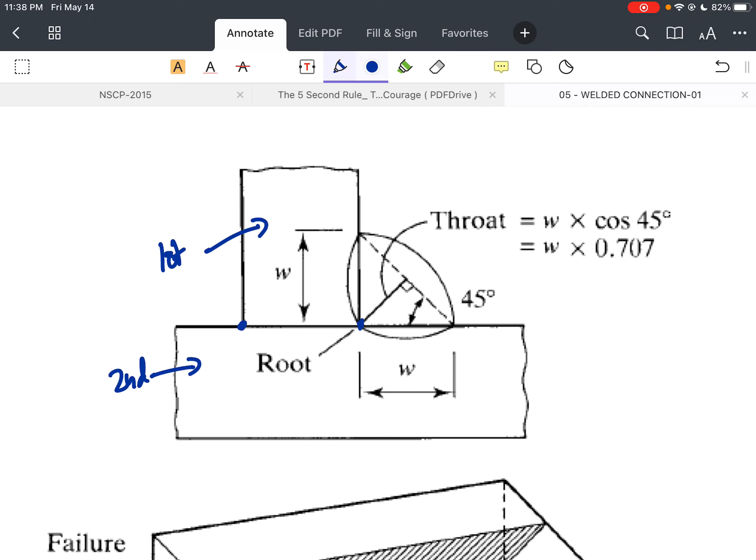So dito sa side na to, kung dito tayo maglalagay ng weld sa right side, ito yung magiging root niya. Ano naman yung tinatawag na throat? Yung throat o your theoretical throat is the shortest distance from the root up to the hypotenuse of the triangle. Ito yung hypotenuse na sinasabi natin. So yung root hanggang dun sa hypotenuse is your throat or your theoretical throat.

The throat area equals the theoretical throat distance times the length of the weld. Now, the effective throat distance is taken as the leg size, times sine 45 or cosine 45, whichever it is, kasi parehas lang naman yung value niya, or 0.7071. So yun yung magiging effective throat distance natin.

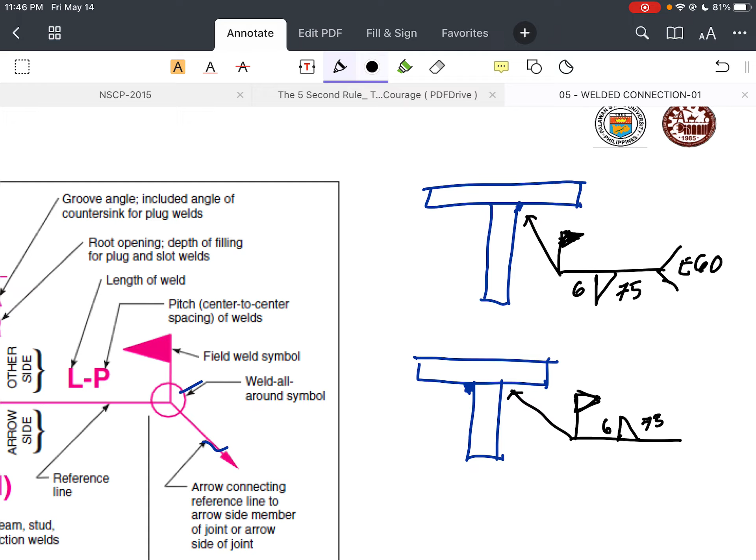Tapos, i-specify natin yung strength niya, which is E60. Parang ganun lang. So hindi naman, depende rin, sabi ko nga, depende rin naman sa i-specify kung anong ilalagay mo. Hindi lahat yan ilalagay mo dyan. Kasi iba-iba rin magiging, ano mo sa types pa lang, iba-iba ng kaagad, di ba?

Okay, so let's go to the matching weld filler metal. The principle sa pag-design ng connection is that the connecting material is always stronger than the base materials. Kung wood man yan or concrete or steel, dapat mas malakas yung connecting material mo. Ibig sabihin, yung matching weld metals natin have to be stronger or mas malakas doon sa magiging base metals natin na pagdudugtong natin.

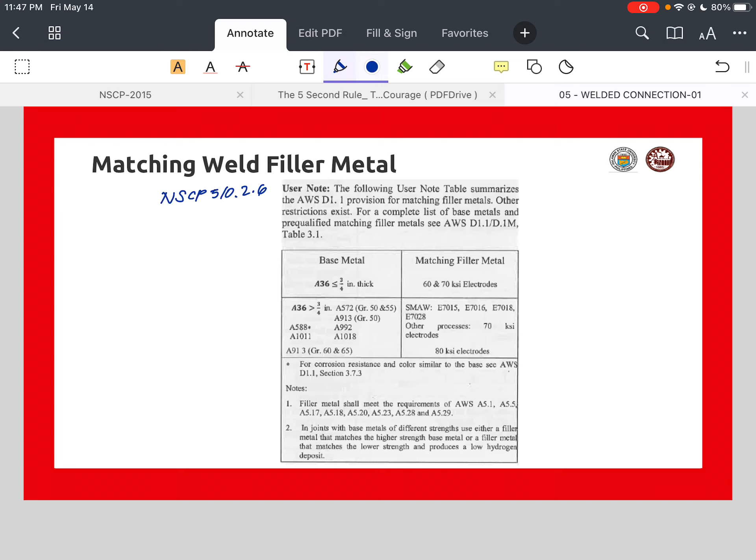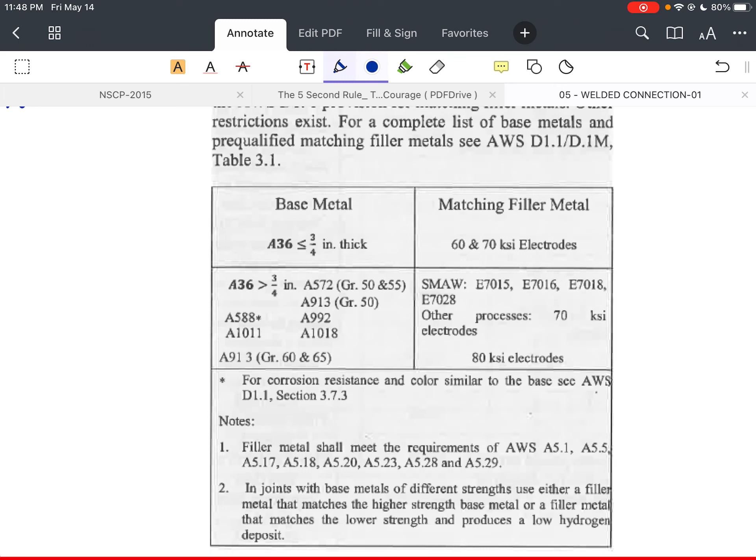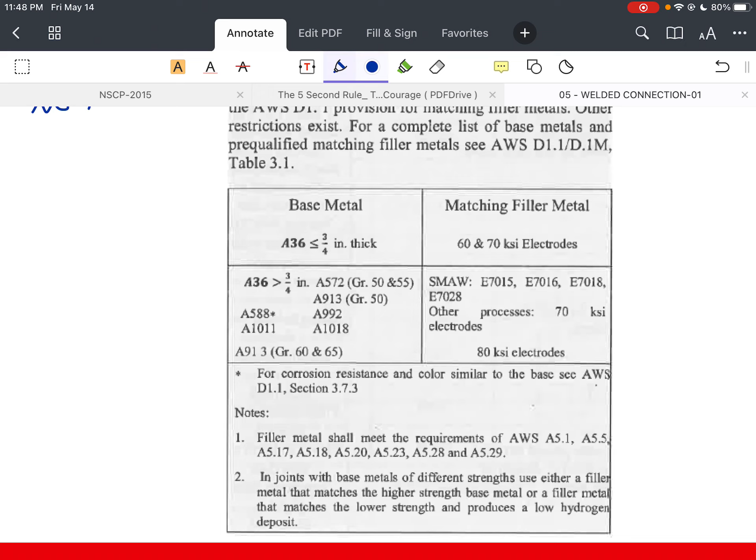Okay, sa NSCP 510.2.6, meron ditong table. For the pre-qualified matching material, and also another table for the CJP groove, this is reproduced here. Okay, so kung A36 na less than 3/4 inch thick or 19mm, ang gagamitin mo dyan is 60 or 70 KSI electrodes. Pag more than A36 na more than 19mm, ito naman ang gagamitin, and so on and so forth.

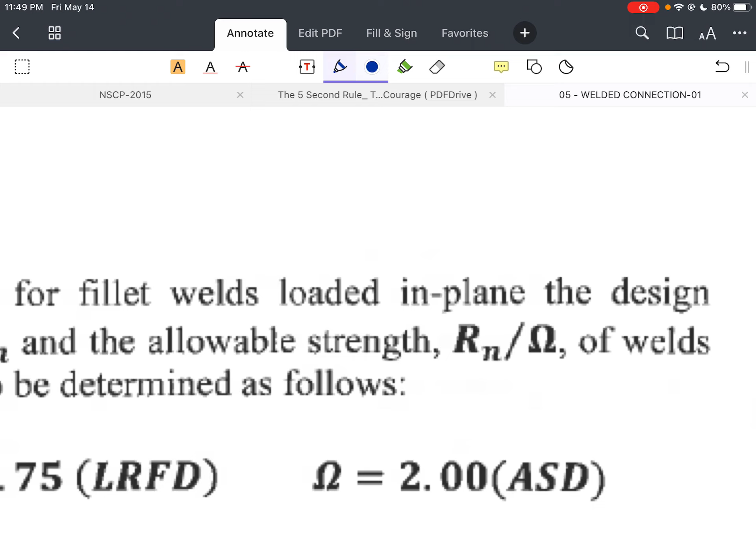Okay, now let's go to the weld strength naman. Sa NSCP 510.2.4, the design strength, which is your phi Rn, and the allowable Rn over omega of the weld, shall be the lower value of the base material and the weld metal strength determined according to the limit states of tensile rupture, shear rupture, or yielding.

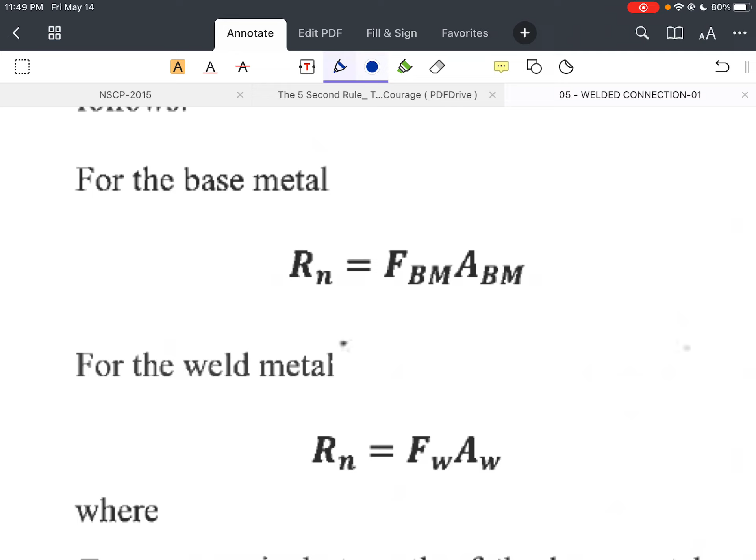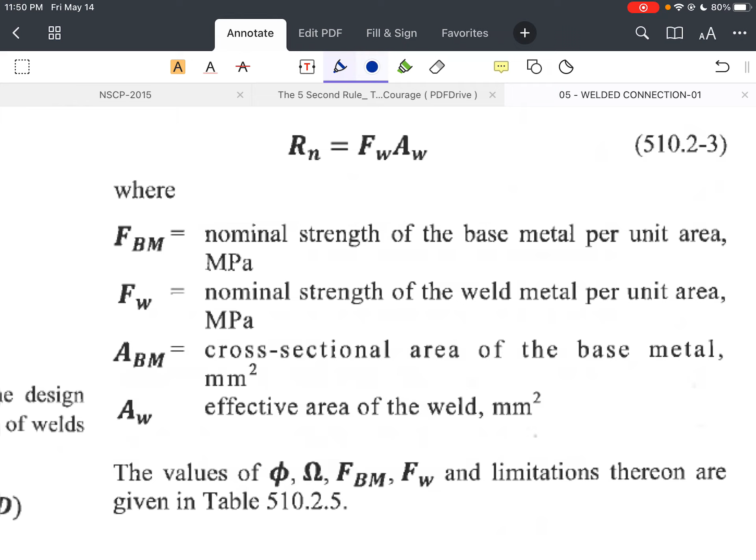For the weld material, or for the weld metal, the formula will be Rn equal to Fw times Aw. Pagdating naman sa base metal mo, ang formula natin is Rn equal Fbm times Abm. Ano ba yung mga variables natin? Yung Fw is the nominal strength of the weld material per unit area. Your Aw is the effective area of the weld. Yung dalawang yun ay para sa weld, and yung remaining two, the Fbm is the nominal strength of the base metal per unit area, and the Abm is the cross-sectional area of the base metal, of course in square millimeter.

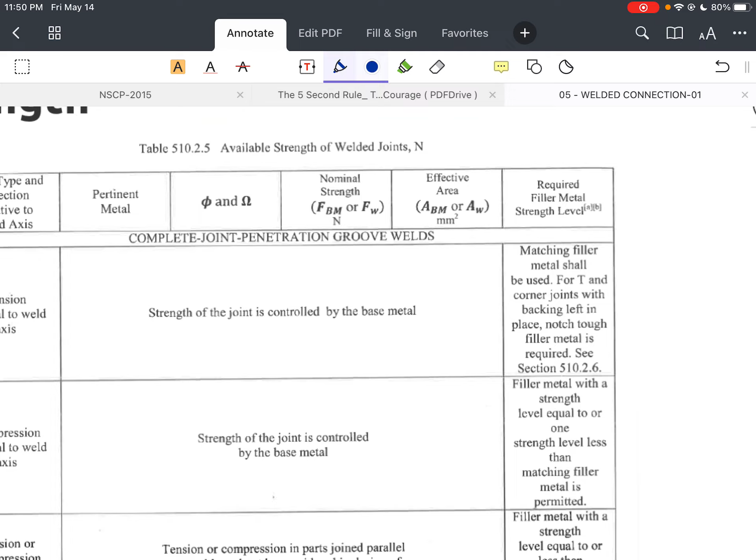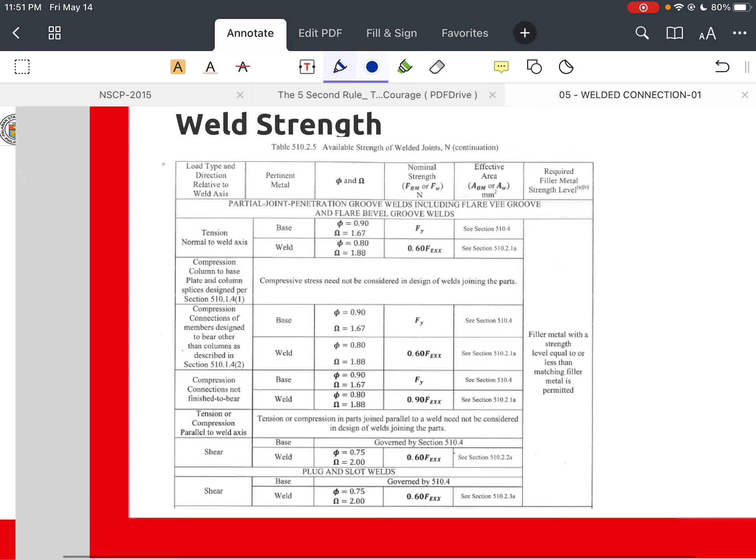Now, the available strengths of welded joints are listed here at the table, 510.2.5 for CJP, and sa next page is yung para sa PJP. Meron din dito, given na rin yung para sa slot and plug welds, and of course the fillet welds.

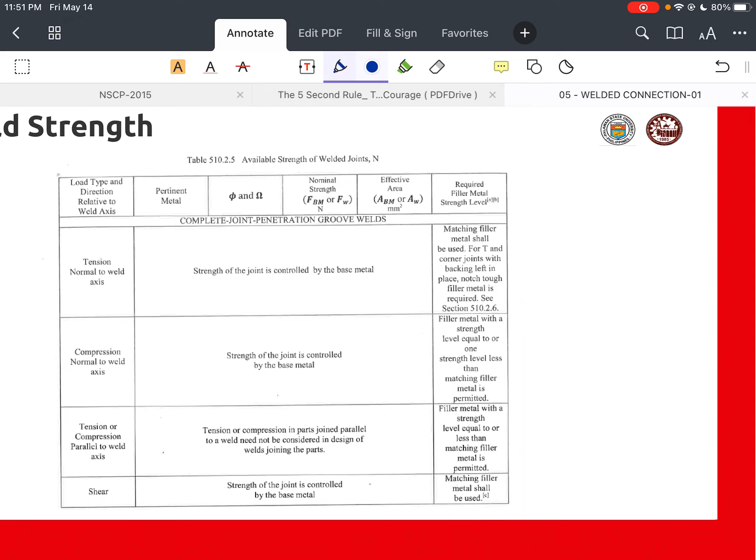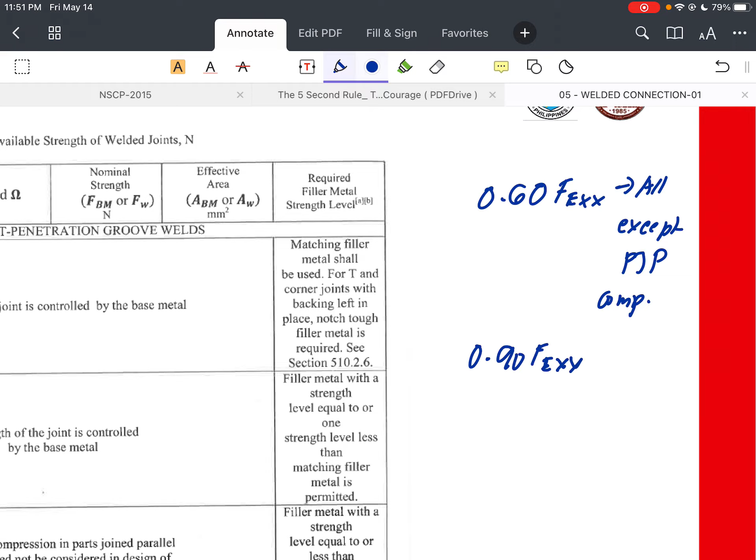So in general, the nominal strength is 0.60 FEXX, except for PJP compression connections not finished to bear, where the nominal strength is 0.90 FEXX. Okay, so tatandaan nyo lang lagi, 0.60 FEXX para sa lahat except PJP compression connection, which is yung 0.90 FEXX. Okay, pagdating sa CJP penetration.

CJP or complete joint penetration welds, the weld should have at least the same strength as the pieces joined, since groove welds are intended to transmit yung buong load dun sa member na pinag-join natin. Para dun sa full penetration groove welds, the area of the weld is at least equal dun sa area ng base metal natin. Now, since the weld material is stronger, the capacity of connection is generally the strength of the base metal.

Okay, now pagdating naman sa PJP, or partial joint penetration welds, kailangan siyang i-check din whether yung weld or yung base material is critical, kasi yung effective area ng weld is mas mababa dun sa area ng base metal natin. Okay, now according to the table, pwede natin i-summarize yung mga nakasulat dito.

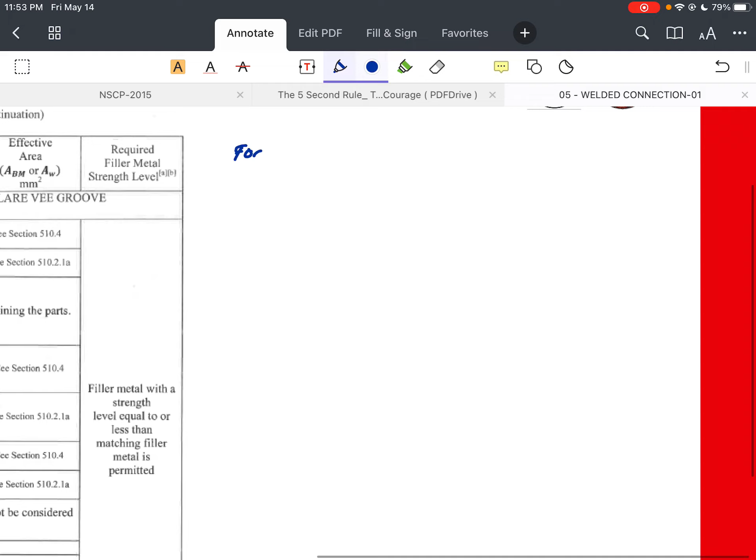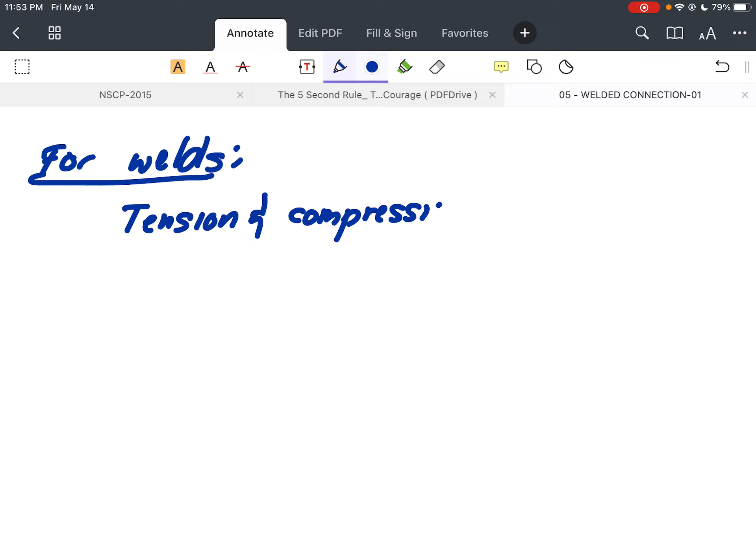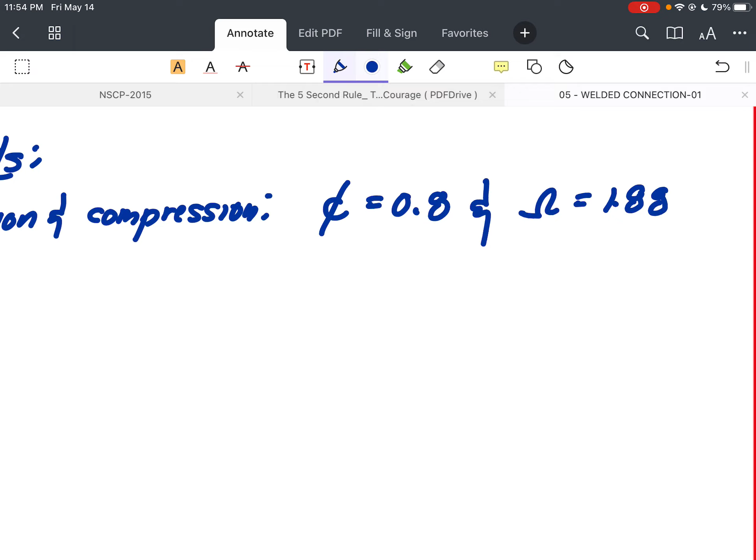For welds, your tension, yung phi natin for LRFD is 0.80 and the omega for ASD is 1.88. Pagdating naman sa shear ng weld, your phi is 0.75 and your omega is 2.00.

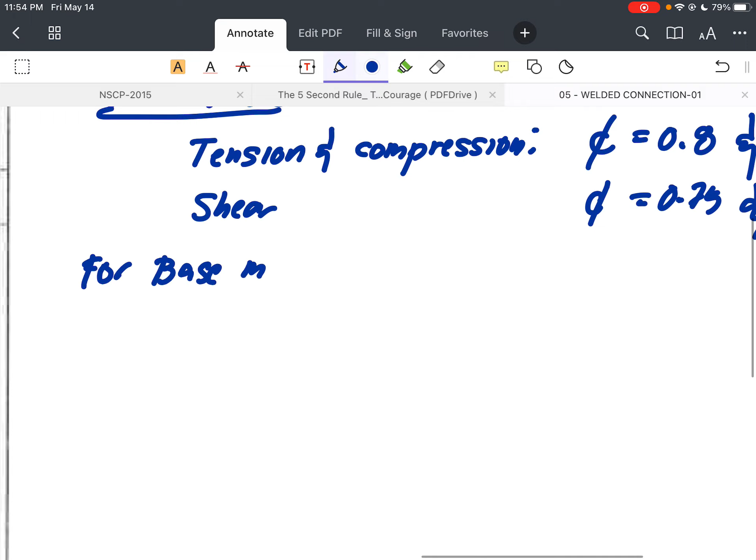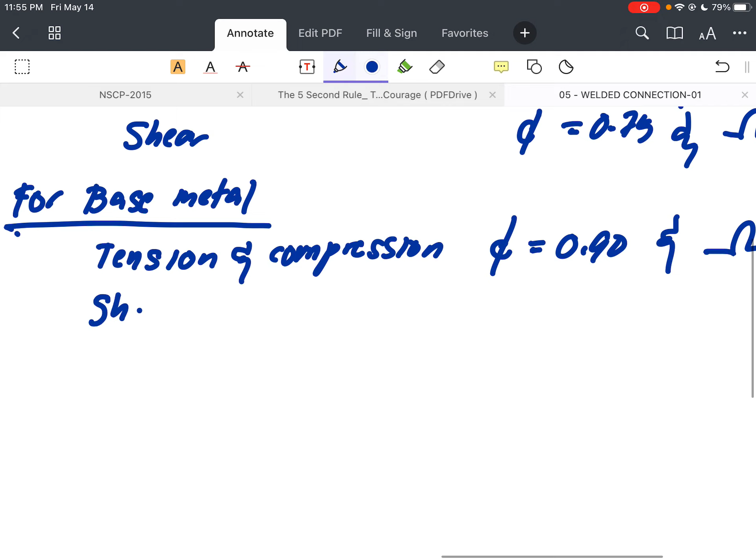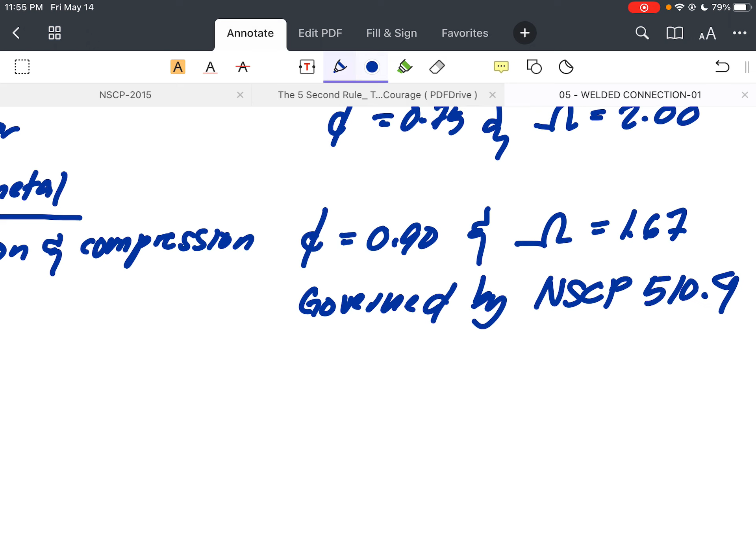So yung base metal naman natin, o yung steel na kinoconnect natin, una doon sa tension and compression or the axial, your phi for LRFD is 0.90 and omega is 1.67. Pagdating naman sa shear, mag-govern siya, or it is governed by NSCP 510.4.

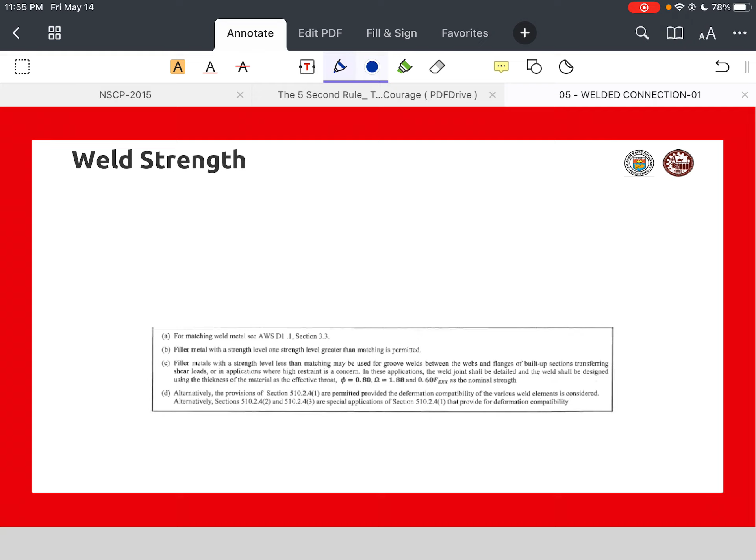Okay, so yun yung summary, or basically ito yung values na gagamitin natin. Ito ay karugtong lang ng table. Kasi mas pag pinilit ko siya dito sa page na to, hindi na masyado makikita yung text, so I transfer the last part sa next page. Okay, so let's go to the plug and slot welds.

So as can be deduced dito sa figure natin, the action of plug or slot welds is shear. Shear yung force na mag-act upon this kind of connection, shear yung mag-act sa contact area, which is defined by the nominal area of the hole or slot in the plane of the faying surface.

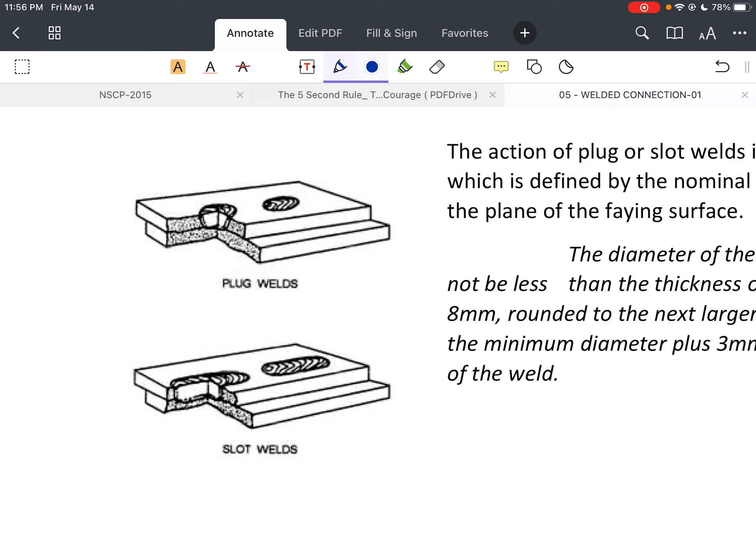Okay, so sabi sa NSCP, the diameter of the holes for a plug weld shall not be less than the thickness of the part containing it plus 8mm. Ibig sabihin, your D should be greater than or equal to T, yung thickness ng part, plus 8mm, rounded to the next larger even mm. So dadagdagan mo siya ng 2 kapag even to, dadagdagan mo to ng plus 2, pag odd, plus 1.

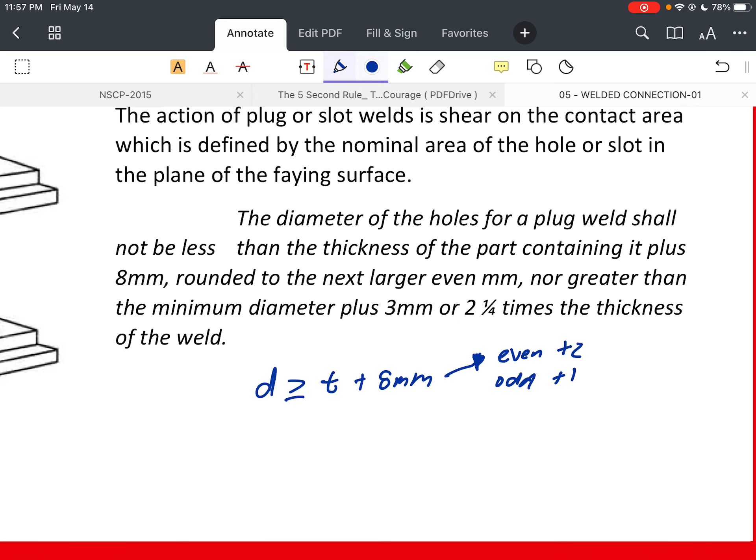D shall not be greater than the minimum diameter plus 3 mm, or 2 1/4 times the thickness of the weld. Again, D shall not be greater than that. It should be less than the minimum D. So it's the minimum D plus 3 mm, or minimum D times 2 1/4.

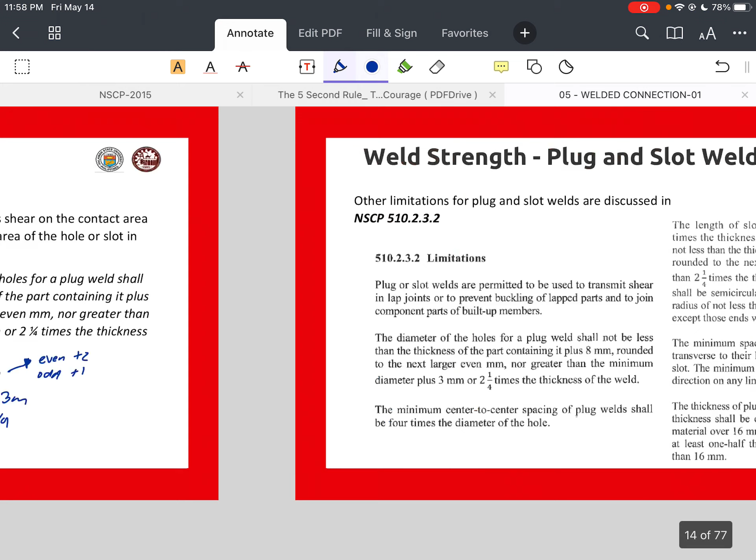So let's have, other than that limitation, there are other limitations for the plug and slot welds in this section in NSCP 510.2.3.2. So just read it, I won't explain the other limitations for you.

So let's have now the example. For example number 1, design the lap splice to develop the full strength of the connection shown. Use A36 steel and ASD. There's no drawing given, so let's draw it ourselves.

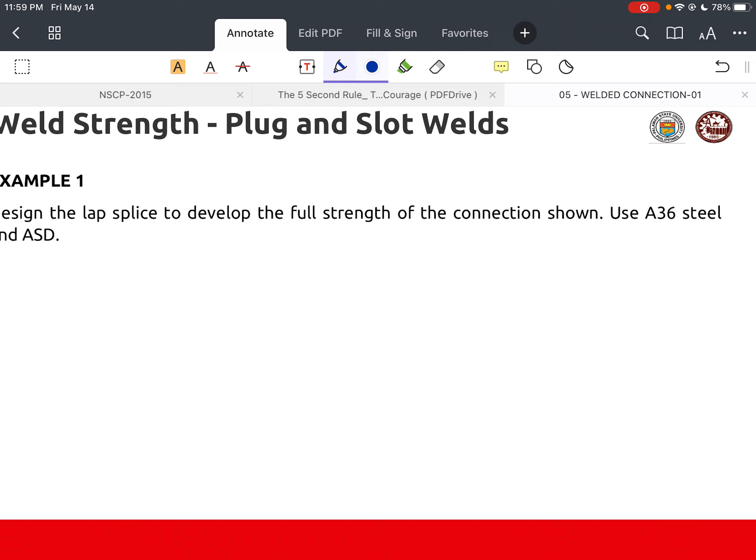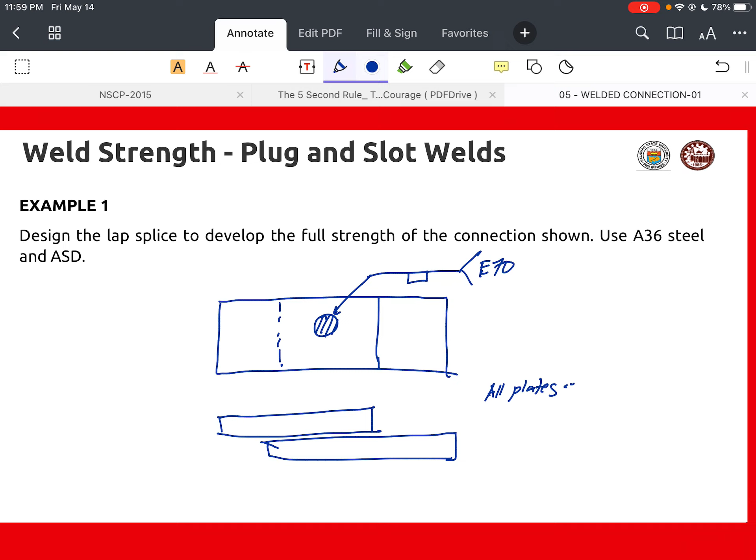So I have here, let's use plug or slot weld sign, E70. So let's draw the elevation. So all this plate, all plates is PL12, or plates with thickness of 12 mm. So you have T and T. What else? Width, which is 250.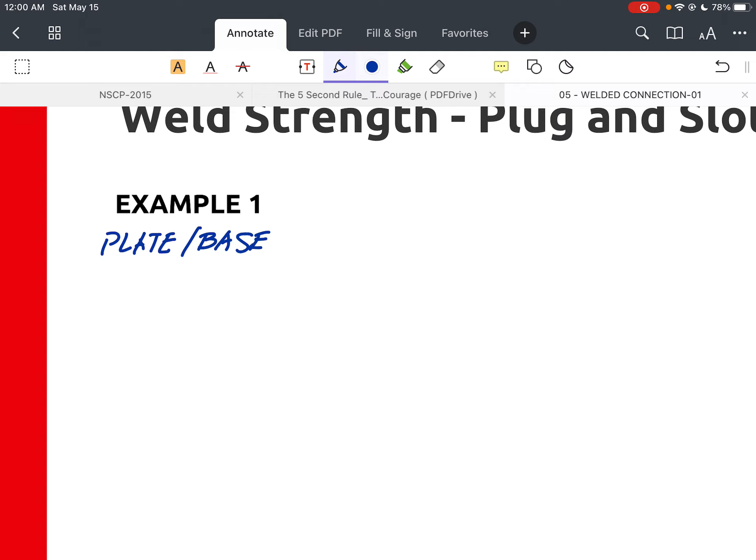Now, the full strength of the plate in tension is its yield capacity. Let's go to the plate, or base metal. So again, the full strength of the plate in tension is its yield capacity. So you have T equal to AG Fy.

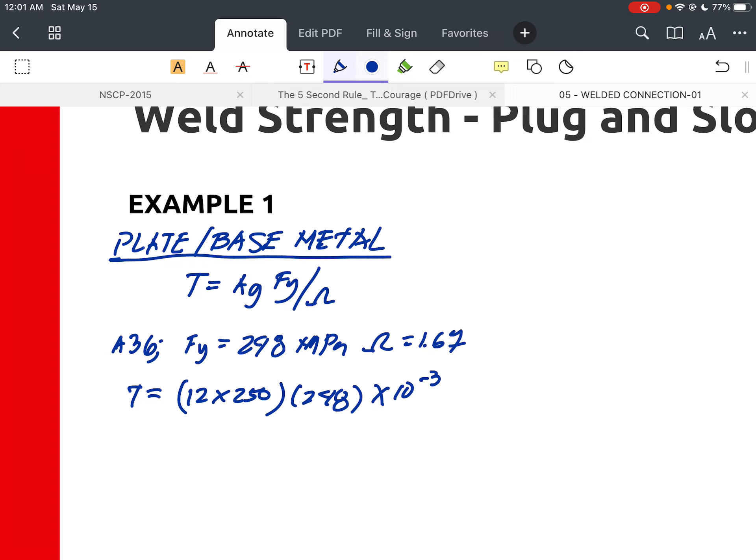We said earlier we'll use ASD too, so over omega. Now, for A36, your Fy is 248 MPa and omega is equal to 1.67. So therefore, the tension capacity of the plate is 12 times 250 times 248 times 10 negative 3 for conversion, over 1.67. This will be equal to 445.51 kilonewton.

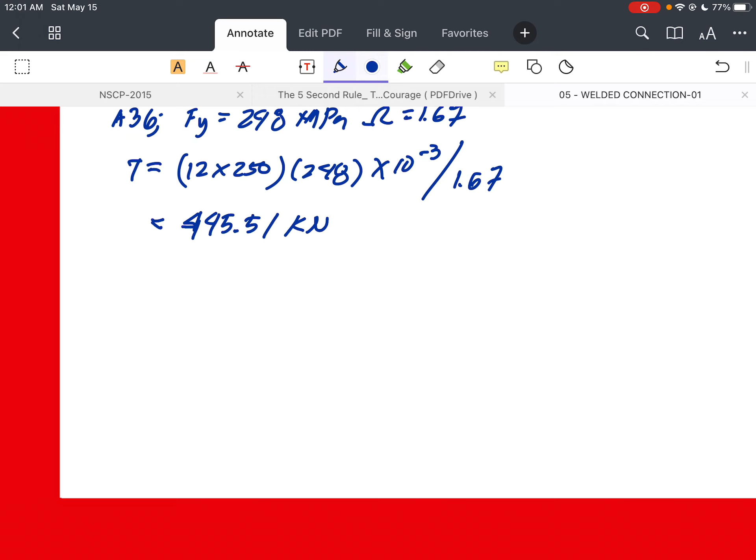Now, coming to our weld, the weld usable capacity based on its shear strength is T is equal to 0.6 FEXX times AW over omega. Now, the required area, or required AW, is equal to omega times T over 0.6 FEXX.

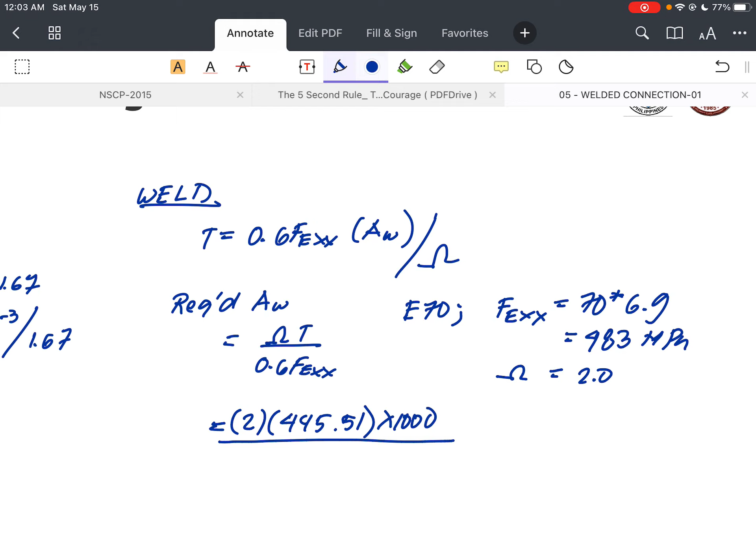The weld metal tensile strength for E70 is, for E70, your FEXX is 70 times 6.9 for the conversion, to become MPa, is 483 MPa. And of course, your omega is 2.0. So your required area will be 2 times 445.51 times 1000 for conversion, over 0.6 times 483, which is equal to 3074.6 square millimeter. Now, therefore, we have AW.

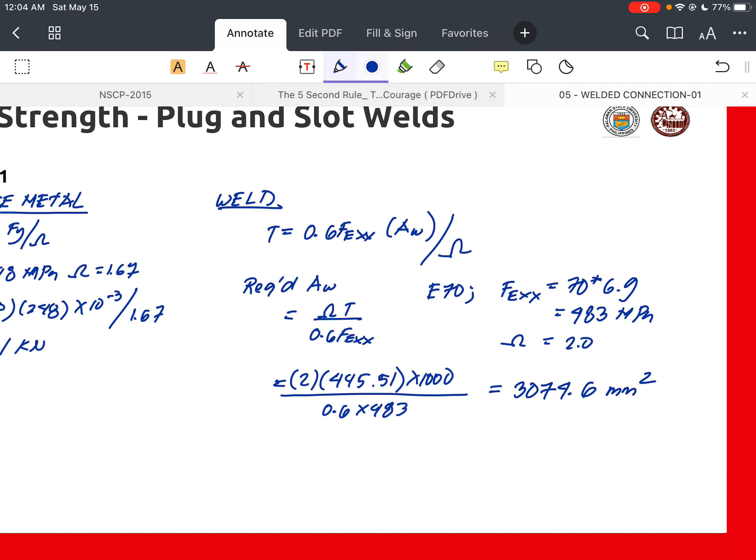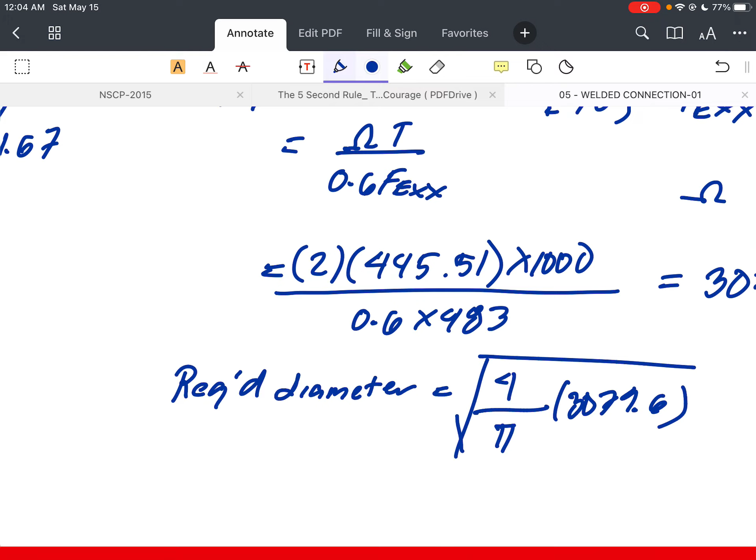So to get our diameter, your required diameter is equal to square root of 4 over pi times 3074.6. So this is 62.6 mm. So let's say, let's say 75, to simplify, let's round up. So 75 mm diameter. Okay, so that's for our first example, our example for plug and slot welds.

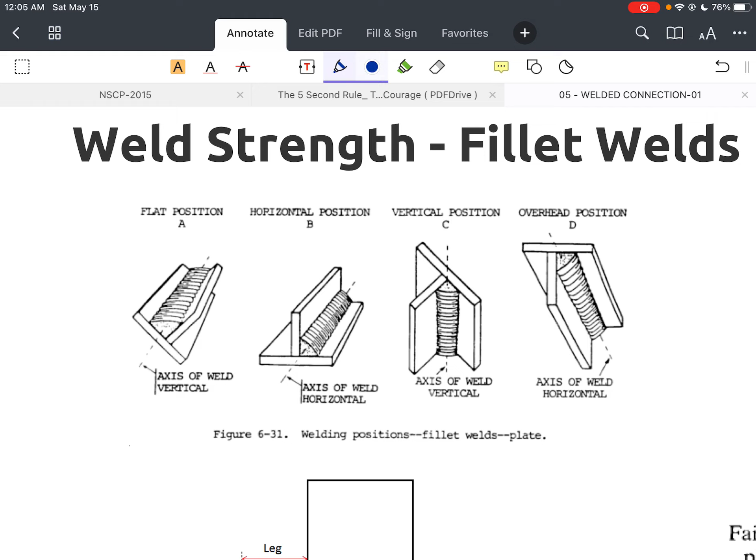Okay, so let's go to fillet welds now. The fillet welds that resist tensile force not parallel to the weld axis, or proportioned to withstand repeated stress, shall not terminate at corners of parts or members. So the typical fillet we have is this. So you have base metals which are not parallel, or not in the same plane. So in this case it's perpendicular. So it's connected with fillet welds. You have the root, and of course you have the leg and your throat.

So just like in plug and slot welds, the stress of the fillet weld will always be shear, regardless of the direction of the force on our base metal.

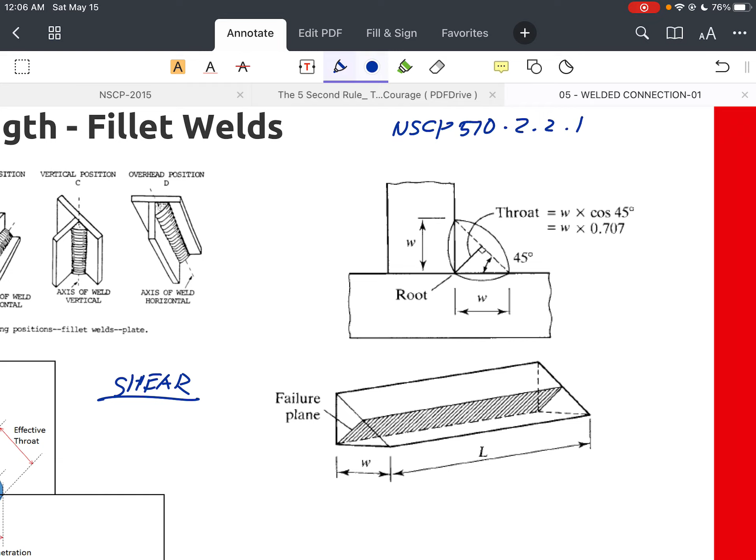Now, coming to effective area, according to NSCP 510.2.2.1, the effective throat of a fillet weld shall be the shortest distance from the root to the face of the diagrammatic weld. So that means the effective throat is given by the expression 0.7071 times W. Or in this case, usually in other books, the leg is written as W or A. So you'll notice, basically the 0.7071 is multiplied to the leg size.

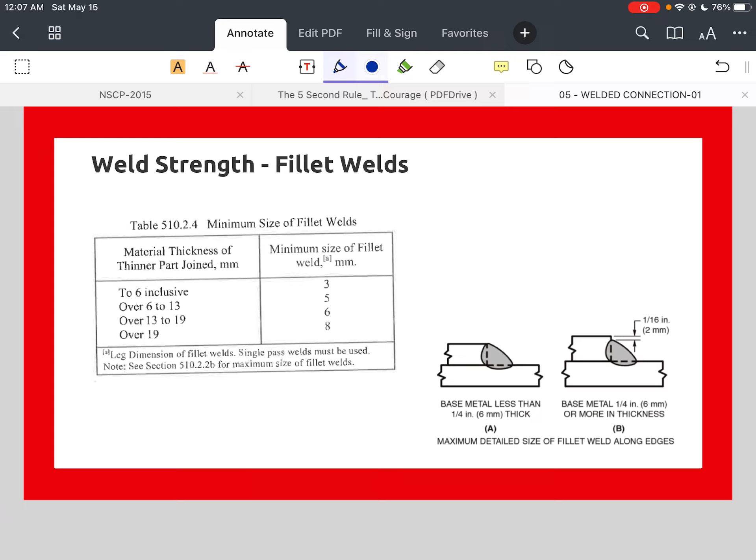Now, coming to limitations, for fillet welds, a minimum size is prescribed based on the thickness of the thinner part joined, according to NSCP 510.2.2.2. Now, the thicker base metal requires more heat to melt in order for the welding to become successful. Thus, a minimum size is required since the thickness is directly attributable to the heat generated during the welding process.

So the minimum size is shown here in Table 510.2.4 of NSCP. So from up to 6 mm, you have minimum size of fillet weld of 3, over 6 to 13, it's 5, and so on and so forth.

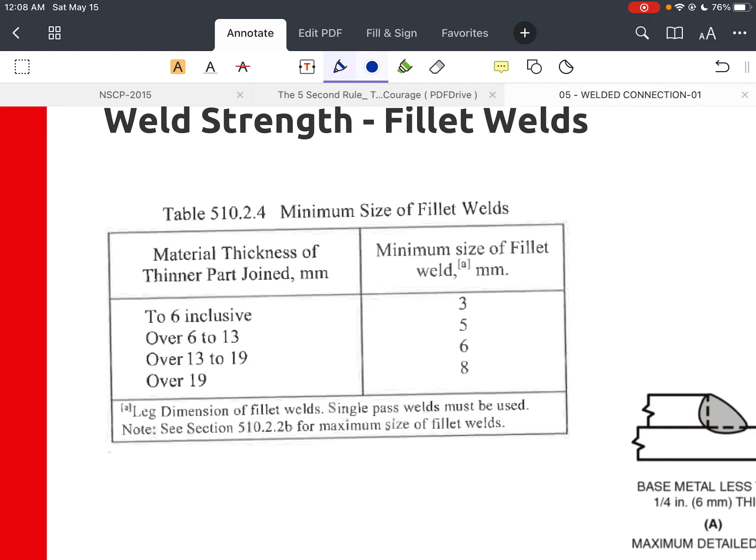Now, along the edges of the material, notice in this figure that the corner of the edge material is assumed to be welded off during the process of welding. Hence, the maximum fillet weld A is 2 mm less than the thickness T.

Our maximum fillet, whether called A or W or whatever you see in the problems, is 2 mm less than the thickness T. So if T is greater than 6 mm, when our T is more than 6 mm, it has an additional 2 mm. For T less than 6 mm, A can be assumed equal to T.

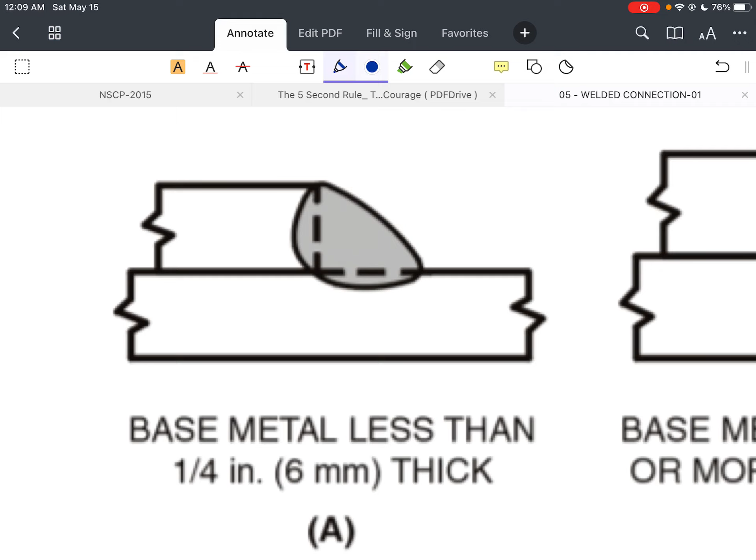Okay, let's write this down. For the maximum leg size A: when T is less than 6 mm, A is equal to T. Now, when T is equal to or greater than 6 mm, A is equal to T minus 2 mm.

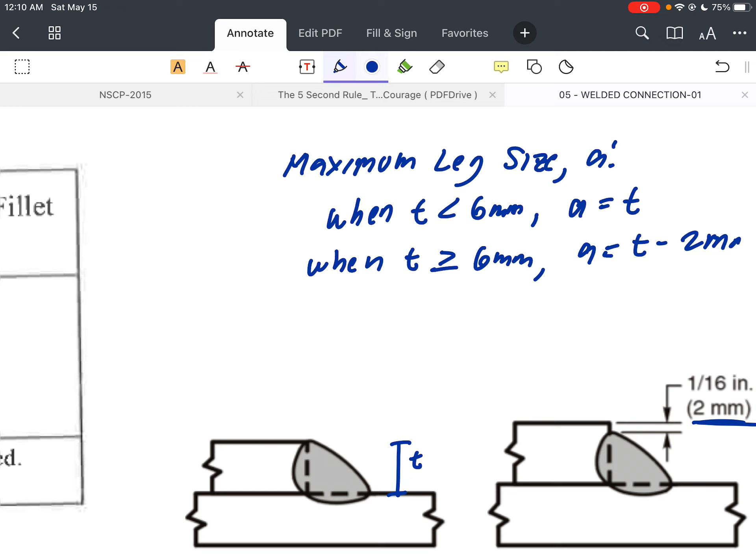Now, the length should be more than 4 times the weld size in order that the whole strength is fully effective. Otherwise, the size of the weld shall be considered not to exceed 1/4 of its effective length.

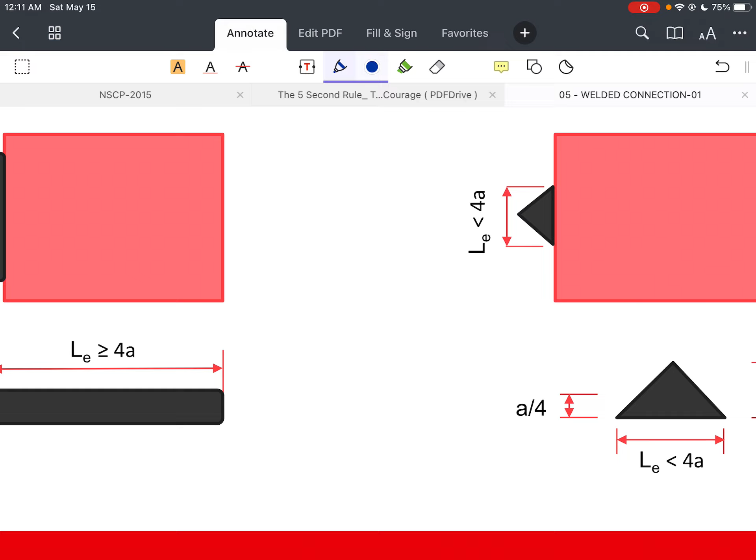Okay, so why is this the case? Notice, if the effective length LE is greater than or equal to 4 times A, there is minimal area loss when the weld length looks like this. But if our weld area is this short, there will be a considerable amount of area loss.

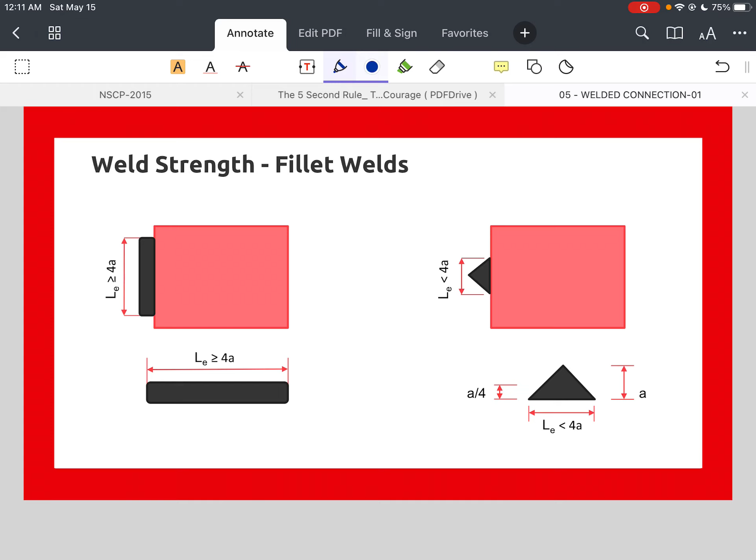Okay, so I hope you understand the explanation for fillet welds. Now let's have another example.

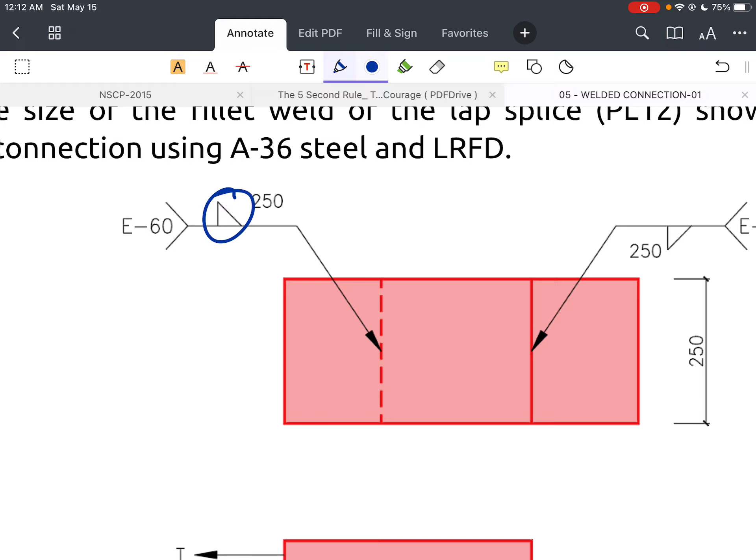Notice we use the weld symbols. E60 is the strength of our weld, and it is a fillet weld with 250 length, meaning all throughout the width of the plate. This one is connected here, on this side.

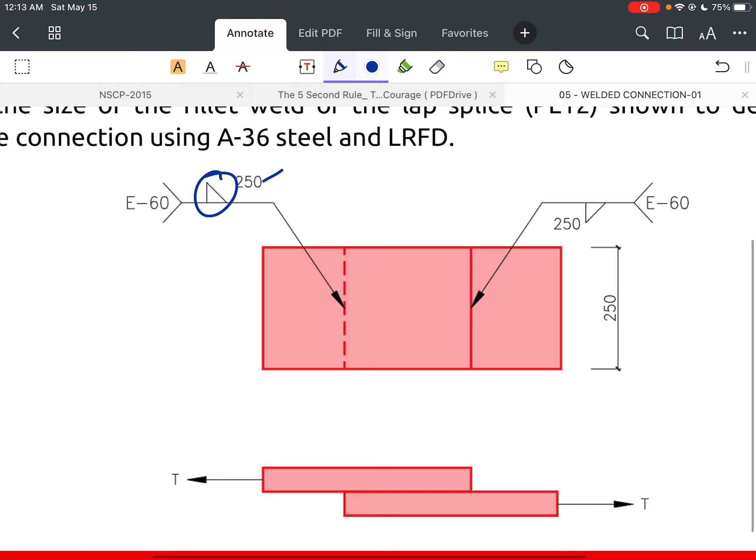This is at the bottom, so sorry—this symbol is on top because the weld is here, and this one is located right where the arrow is pointing, that's why the fillet weld symbol is at the bottom. And this is both with weld length of 250 mm.

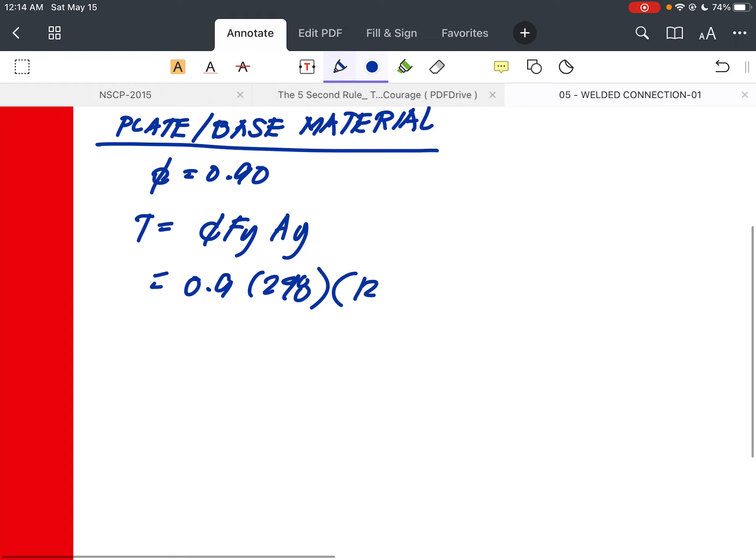So let's go first to the plate or base material. The tensile capacity of the plate using LRFD, our phi is 0.90. So T equals phi times Fy times Ag, which is 0.90 times 248 times 12 times 250. So we have T equal to 669.6 kilonewton.

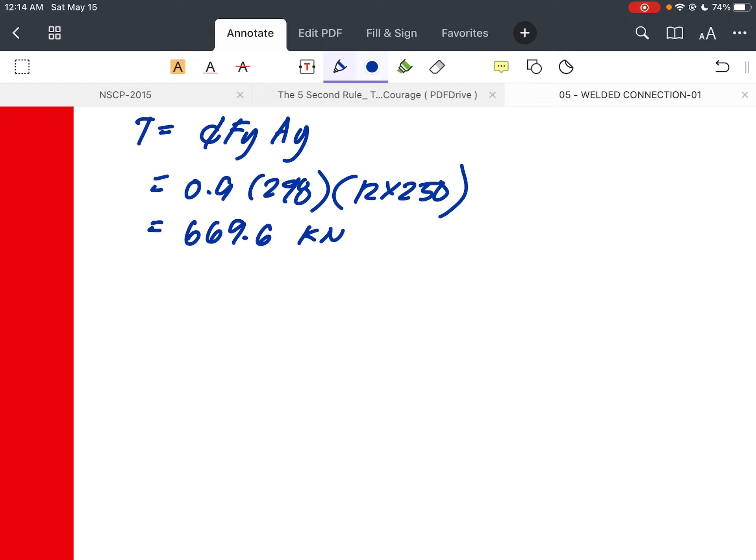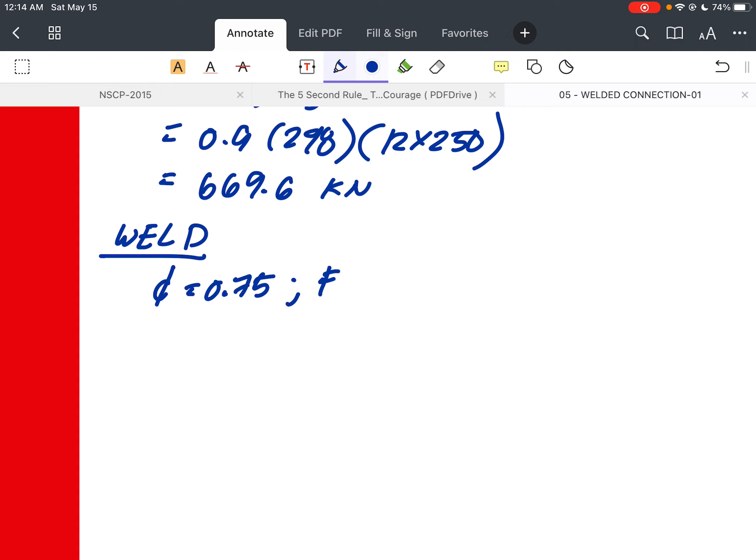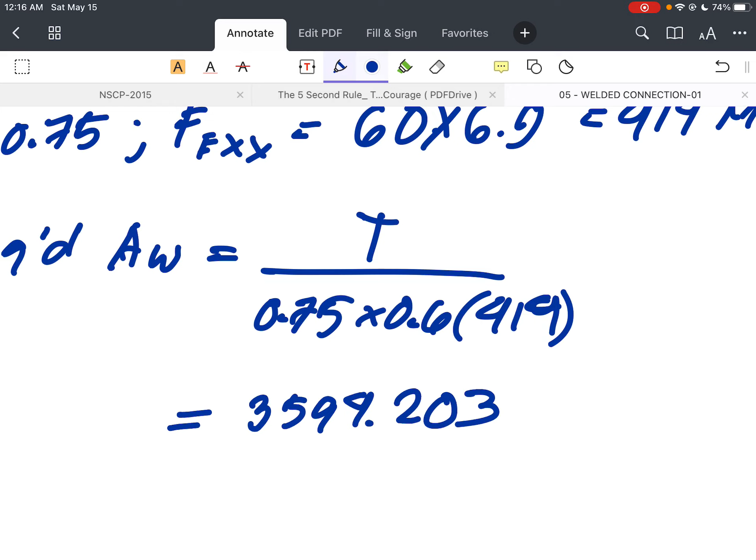Now for the weld, the required weld area: again phi for shear is 0.75, and FEXX is 60 times 6.9, which is equal to 414. Now the required area AW is equal to T divided by 0.75 (our phi) times 0.6 times 414. This is equal to 3,594.203 square millimeters.

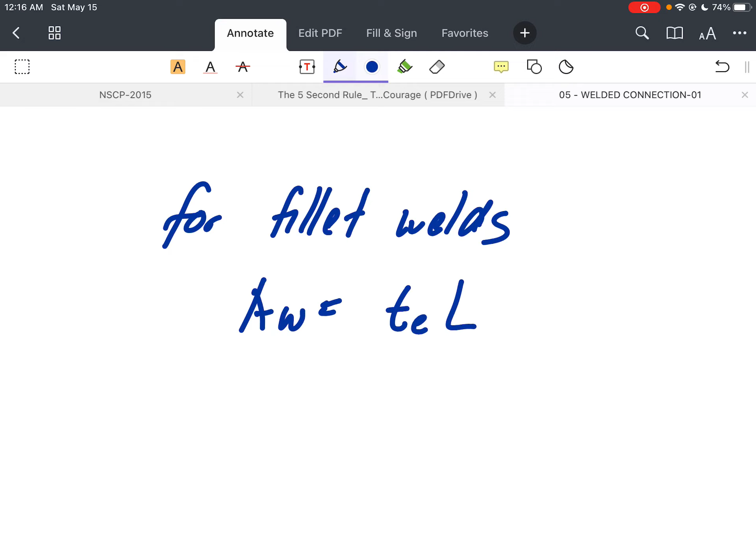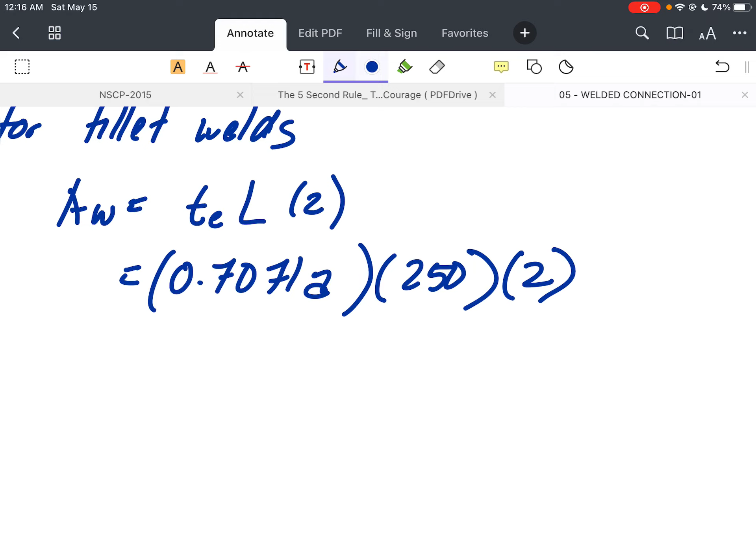For fillet welds, AW is effective throat times L, times 2 since we have two welds. This is equal to 0.7071—let's use A—times length 250, times 2 because we have two welds, and of course our AW which is 3,594.203. Let me fix this.

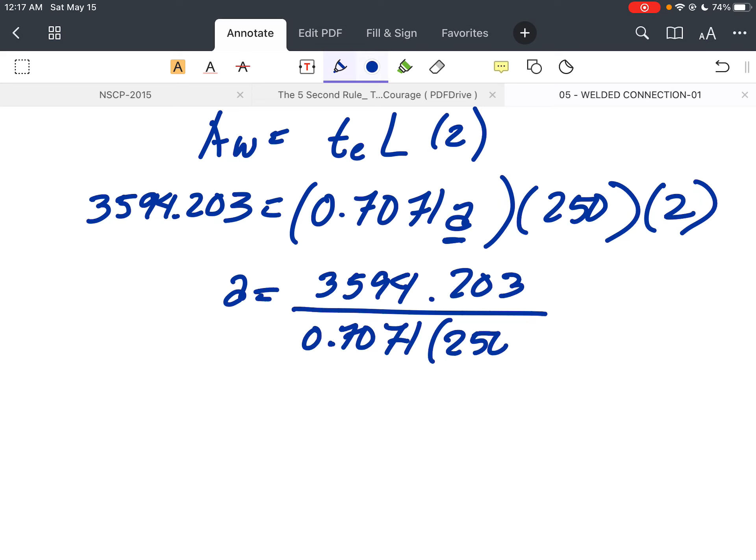So our unknown is A. Let's simplify. We will have the value of A equal to 3,594.203 over 0.7071 times 250 times 2. This will be equal to 10.166 millimeters.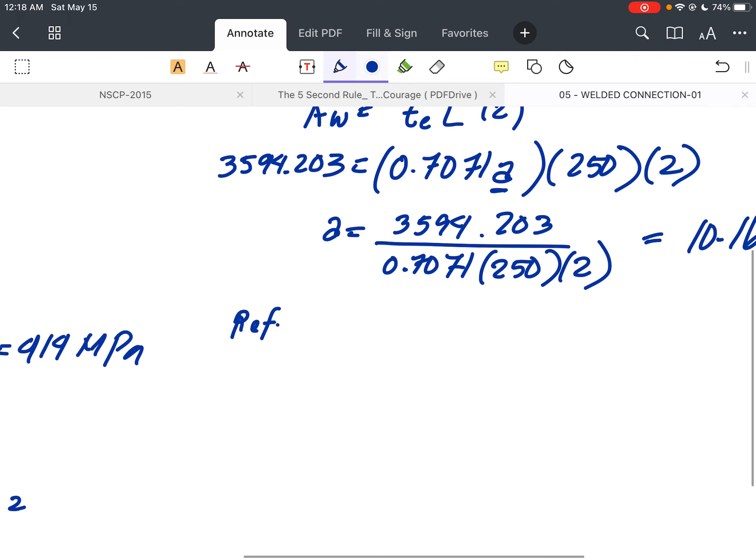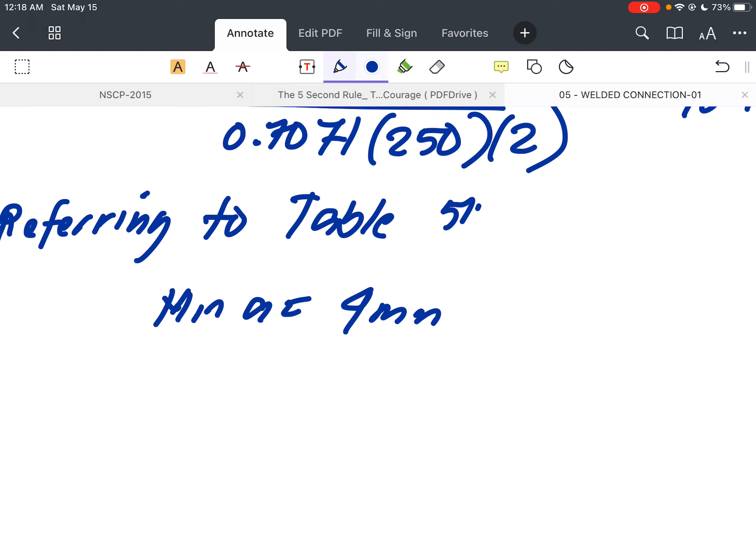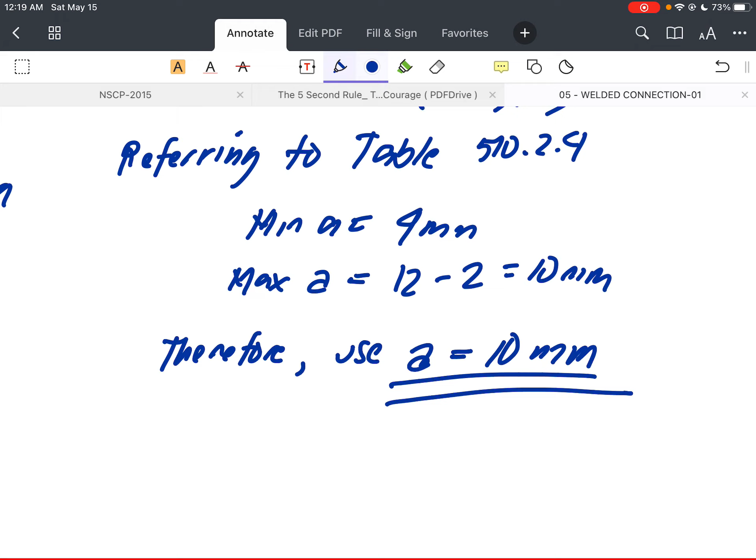Now referring to... our minimum A is 4 mm. Sorry, this is not table 10.2, this is 510.2.4. And our maximum A, because this is already greater than the limit—since the thickness of the plate is 12—we have 12 minus 2, which equals 10 mm. So therefore, use A equal to 10 mm. Okay, that is your answer for the second example.